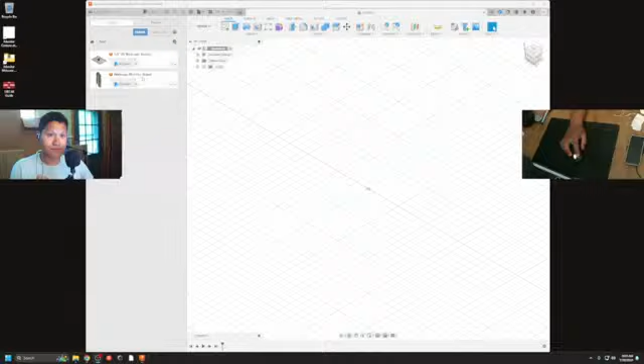Gentlemen. So, last time we left, I had... Okay, I gotta check that. Okay, it's reminding me about tomorrow. It's like I swear I don't have anything today.

Last time we left, we were thinking that I wasn't gonna make the actual camera attachment that goes into this shoe mount. But I've done some thinking, some research, and I believe we've changed our mind.

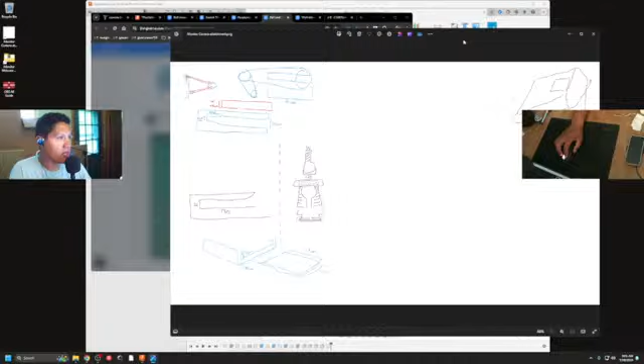I have to pull up the right website though. I think the biggest inspiration we are going to get is this one. This is pretty much exactly what we were going to do originally. So let me open this up. You know, a screw, and then we put this on top. But for some reason, this makes it seem easier.

Stop. Because, why was it? Well, one reason I didn't just want to buy the hardware, because it was like $6. I was like, I can print this for like $2. That's one thing. Right now, I think we can do this where it only costs like one bolt.

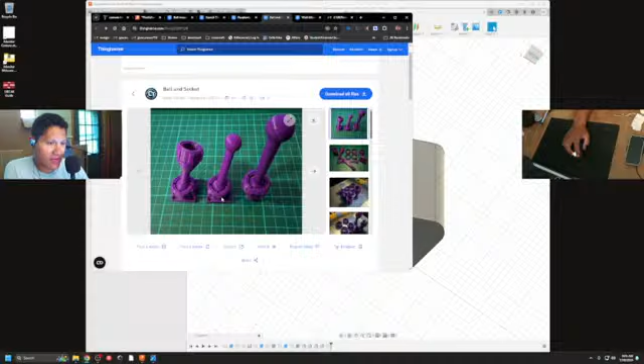Because if we can just make this assembly, or just steal his assembly, which I believe I could do, but I think we're not going to, just for the sake of a learning experience.

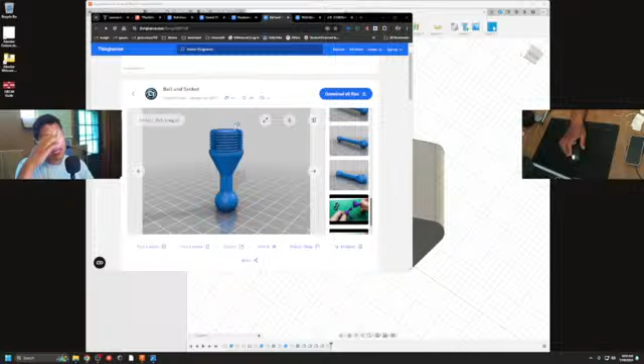We are good. Make sure I was on the right scene so you can see what I was doing, since I do accidentally have on the wrong scene all the goddamn time. Epic Pen is opening up.

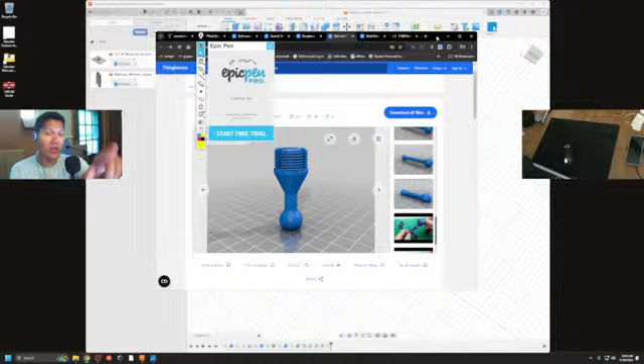Also, guys, I finally got my desk camera. I got my setup pretty much solid. This camera, I've been juggling things around, trying to figure out how to get it to exactly what I wanted. And the problem was this camera's color temperature was wrong, so I'd set it manually. I was like, well, that makes it very useless, because the light outside is changing all the time, there's sun coming in, the light temperature will be whack all the time. But also the quality was a bit off, a bunch of stuff. But I was able to download an update.

Okay, either way, so my thought is we can just have a nut that is held captive in the plastic here, and then it'll rise up out of the ball and have threading available. I was also thinking we could have a cap here, because we don't want it just falling out, and the cap could have, if this is where it's held captive.

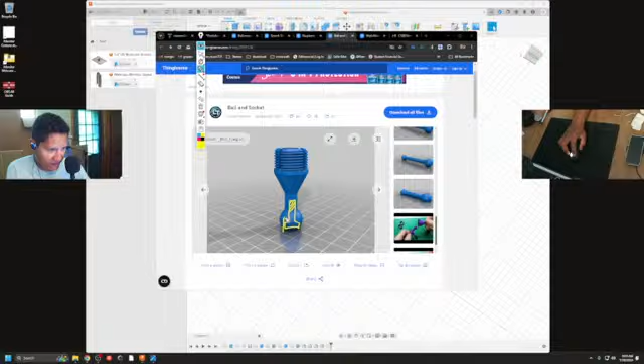And I was thinking of doing it like, since it's probably going to print this way up, I was thinking of just having a taper here. I don't think that would mess it up, like where the bolt would sit, and then it would make printing easy.

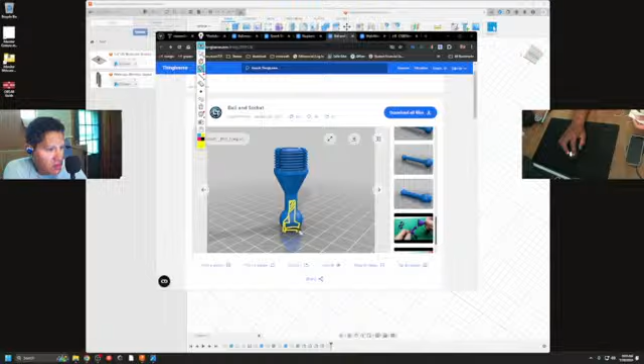But I was thinking we could have a little cap here that, I don't know, clicks in somehow, and didn't go all the way to one of these edges. So you can go in there with a flathead screwdriver and pry it off if you needed to get to the nut or bolt, which I don't think you would.

Either way, this is what we are going off of. We're gonna figure out how to do screws, I guess, right now is the game plan.

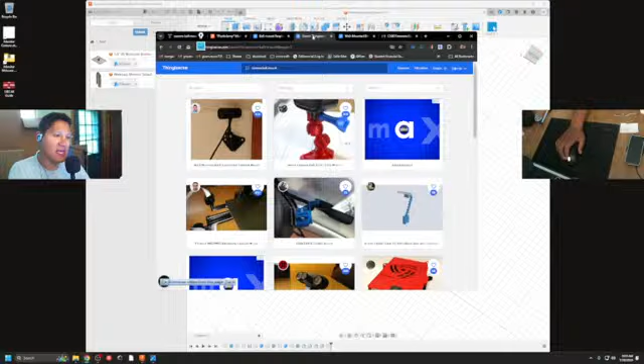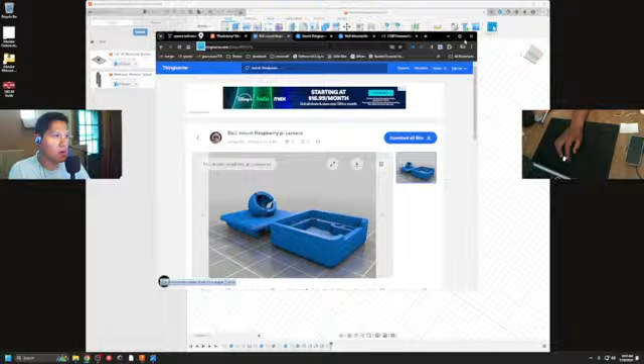Did we lose our original? Might have, I'll have to pull that up in a second. Ultimate mystery.

This one, okay, we'll just have one bolt. We're not going to have these screws either. Where he has this plate that is screwable in, that will just be our hot shoe, or our shoe mount, you know. I should probably pull up my CAD because I know I'm eventually going to mess with it.

Okay, so yeah, the plan is... the other thing I liked about this is it didn't have the taper. My original picture, I was like, the only way this works is if I have a taper so that it cinches down on it.

But this guy, I don't know if it'll let me open with Paint through the shortcut. It will, Epic. This guy instead has, we're just going to redraw the whole thing. Sure, with straight lines. Okay, straight lines that aren't so fucking thick. Oh, there we go, 1 pixel.

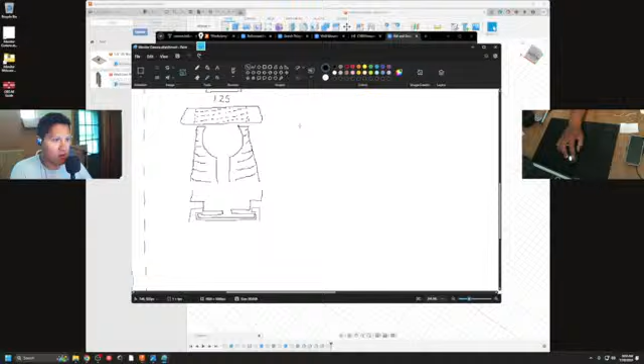So we would have this be indeterminately cut off. Obviously not past the halfway point, but it could be anywhere from here to here really, depending on how flexible the print is, the limiting factor.

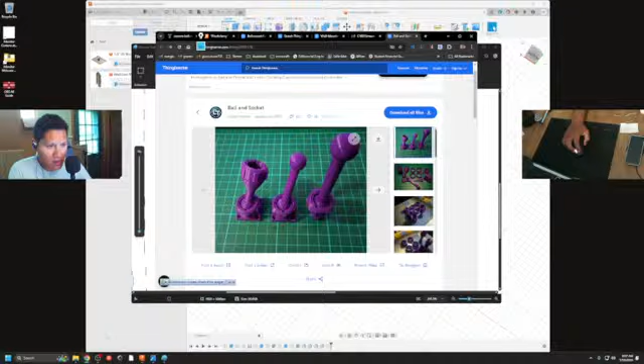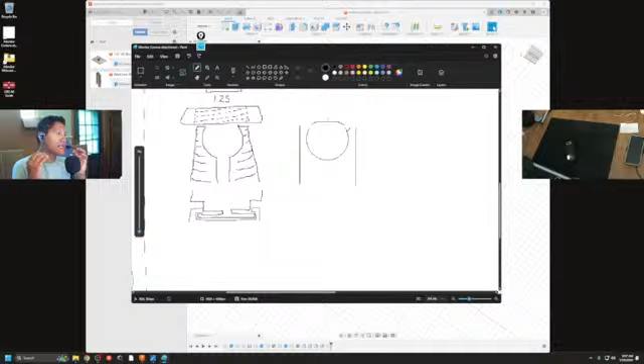Let me pull up this thing for reference again. Like this, I really like this design. So it uses straight threading and then this little lip here, and that lip will make the top half of this circle and push it down, which means this ball, like the socket, can literally be exactly how big our socket is. I don't need to be messing with too much tolerances. I probably still will have to, but this will essentially be exactly how big it needs to be, and this will just be a regular thread, which I feel like would be much easier to code, to model up, that is.

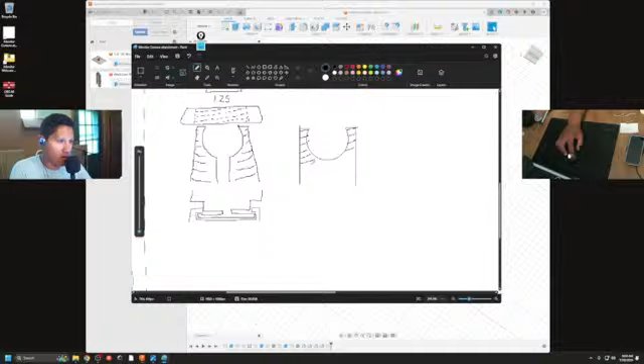Perfect. And then this cap, we're just going to draw it for the sake of our sketches. Bring that out a little bit. We'll have the same thing that we drew on the other side. I'm just going to draw it separately. Plus this lip.

Lip won't go out. It doesn't even need to be a lip. It could be flat right here, and that would still just push the ball into this material, you know, cause friction. I was overcomplicating it, which is probably good for modeling practice, but not good in totality.

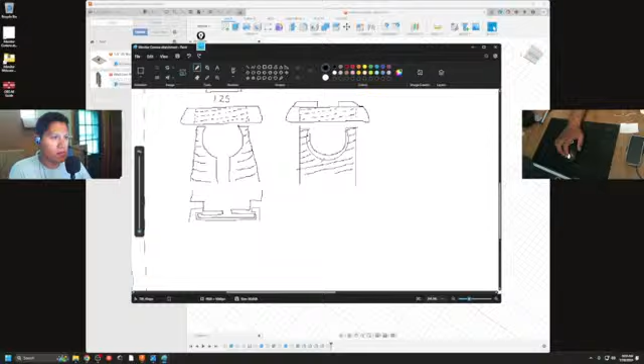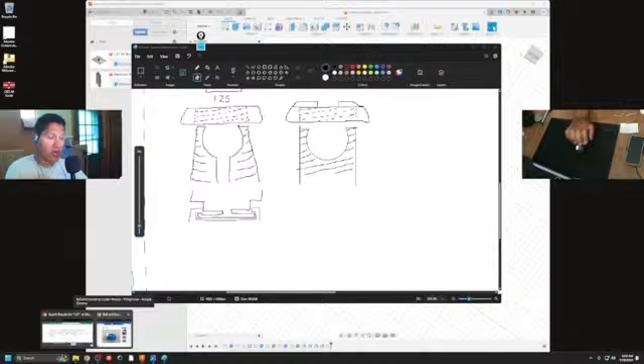So let's erase this ball on the inside real quick. Multiple clicks in case I mess up, so I can undo one of them. I drew that so you'd know it was separated - that was the other thing this guy did. The example I had in person, maybe I should add notes, because maybe there was more than one separation here. But this guy made me realize I can segment it a lot, I can do whatever I want to it.

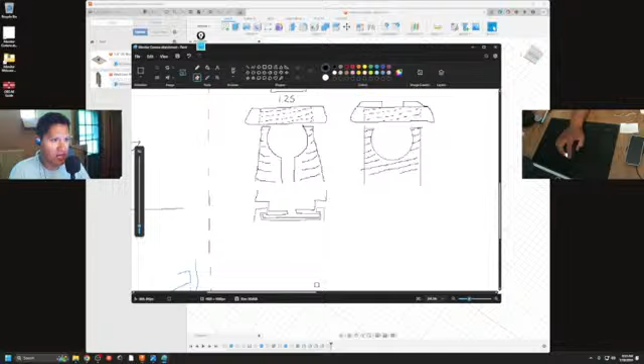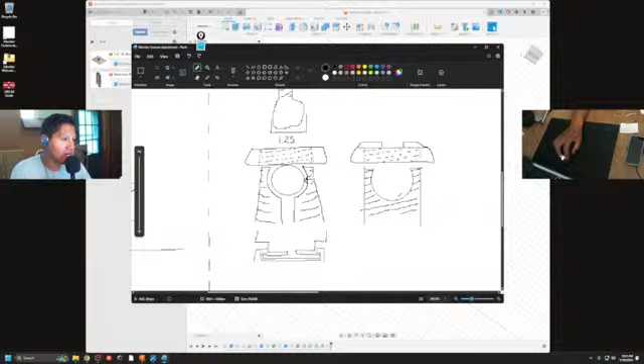Which is what opened my mind to this possibility more, because not only do I not have to do the weird taper, which would be hard - the way the ball goes in. On my original design, I think the ball was supposed to go in loose, and then this taper was supposed to cinch the side down on the ball, which is cool and dandy but unnecessary. That literally means, because these curves will be different, there won't be as much contact. But if our ball is literally the same size as the socket we print, there's obviously going to be max amount of contact.

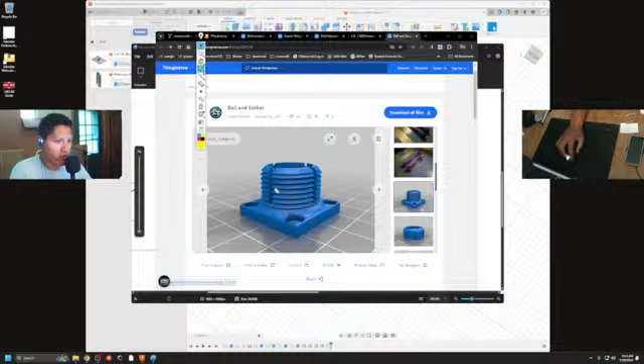So my idea was we can make as many segments of these as we want, and we can change how flexible they are, because the ball will need to pop past this slight curve here, become more like semi-captive. To manage that, we can change how connected they are at this bottom part - if we have it like this square, it's going to be pretty stiff. If we cut it off a little bit, less connection, it'll be less stiff, and so on. We can print off one of these segments and see how stiff it is and change it. There's a possibility of the plastic being brittle, but I think this is such a low tolerance, a low bend, that it won't matter. That's my theory.

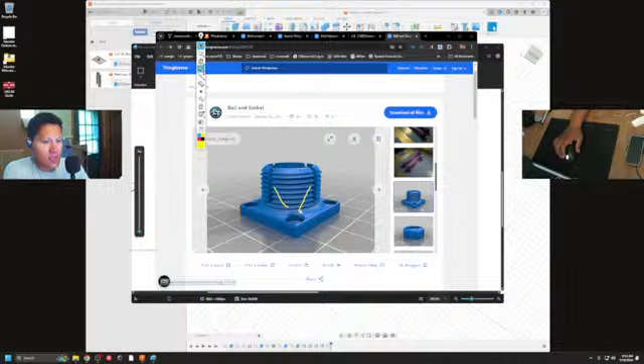But yeah, that's the game plan. So it's pretty much time to find out how to model a screw.

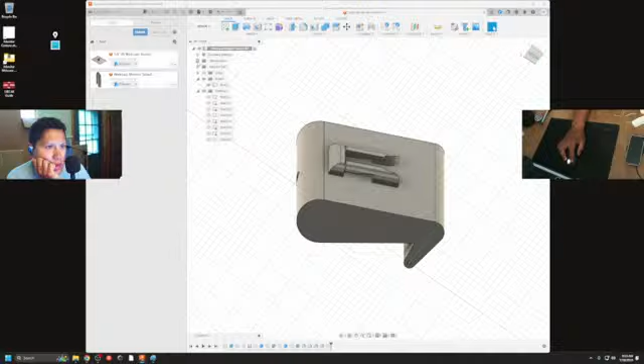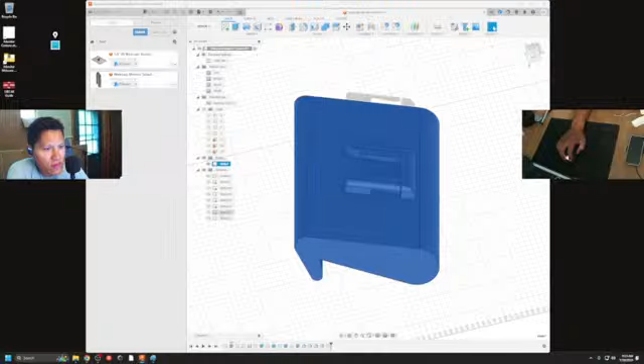I don't think I can get inserts from mounts, but we actually probably won't need this anymore. This is for our old webcam that we just had on there, because I could just point it at my mouse. But our new webcam, for the purposes of modeling and doing cool stuff, is 4K.

I'm gonna make a duplicate so I don't mess up. Okay, where this is located - we can zoom and enhance without much quality loss. So I can really be like, oh, I'm doing this. Like yesterday, or last stream where I was showing the hot shoe and whatnot and the tolerances - I can just zoom in, and that would be epic. That's what we would love.

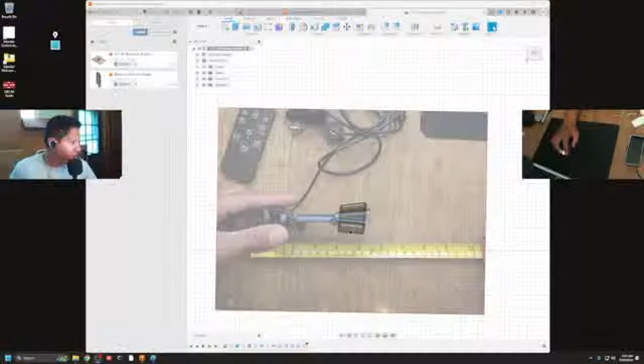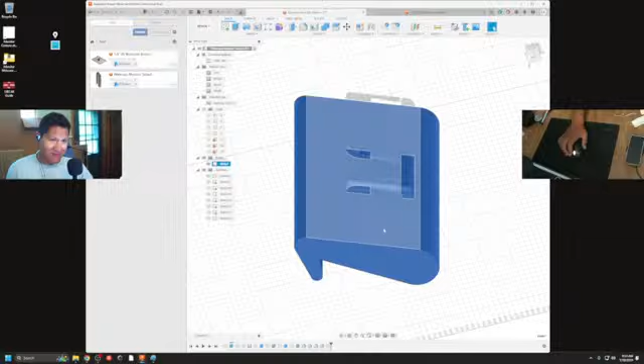So this is not that important anymore. If we don't have the component, then we don't have it. I'm just trying to see if there's anywhere I could have lost it. Every folder is open, every body is showing. This lines up that this is just the end of this build, has nothing to do with the second one. Luckily the little square head is not hard to model, but it's annoying it was gone. I was hopeful I could keep them in the same file, but it appears not.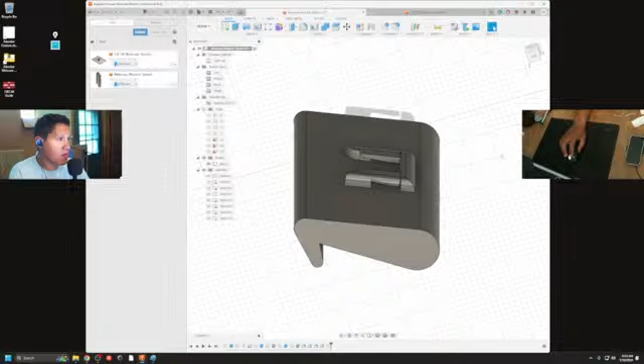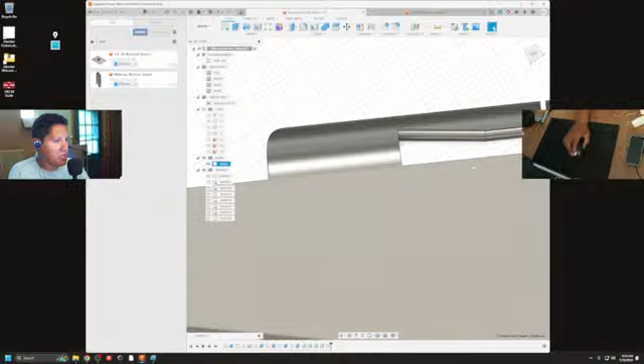So we're going to go to our sketch, edit sketch. Maybe leave the inspect menu just so we can see what our dimensions are. I'm fairly sure it's 1.8 by 1.8 by 0.2. Finish sketch. Oh, I have no measuring device to measure this area, there's no line there.

Actually, if we edit this sketch, I believe - did I do this one separately? Oh no, that's for pulling out the tabs. Okay, finish sketch, this sketch. Am I tripping balls, are these sketch? Oh no, okay, so there's one tab on each side. Yes, we're figuring it out, we're going back in time. I wish escape would, if you hit it enough, would just go out of the sketch. Okay, there we go, we can see what we're doing.

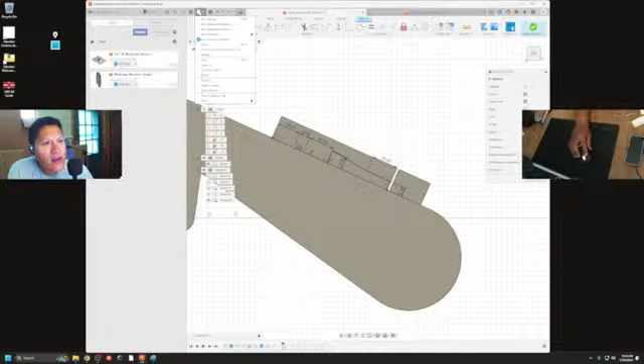So this is 17, this is 25 tall, so we make ours 0.2. So 1.8, 1.8, 2. Let's make file, new design, quarter 20 shoe socket mount - something, I'm just thinking of the name. Quarter 20.

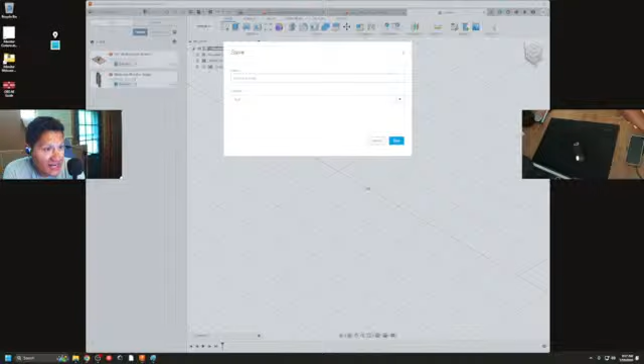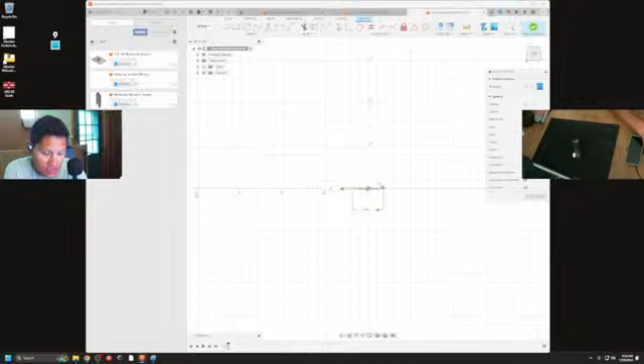What if we go a hot shoe? No, sorry, shoe to socket. I think we can change that later, it's not too important. We will start a sketch on this bottom plane, square from center. Go, and in millimeters, so 180 - it's 18 millimeters, try 18. Enter. Extrude, okay sketch, pull, make sure it's in the right direction. And just 2 - I believe that looks too thick, but no, it's gotta be correct.

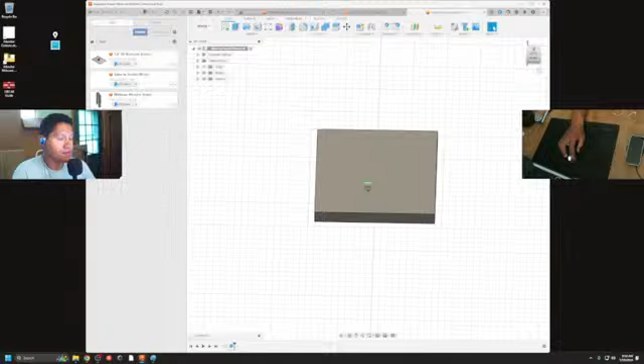We could fillet some of these corners, but I don't think so, I'm just gonna leave this. And now we do need to see what the internal - save again. We go forward in time now. Maybe, finish sketch, forward in time. But this internal is, I think I just have to look at our press pull.

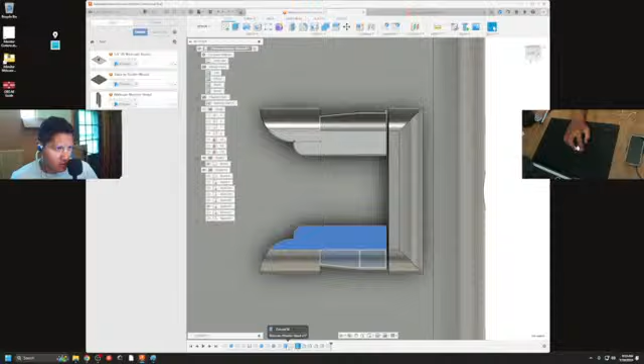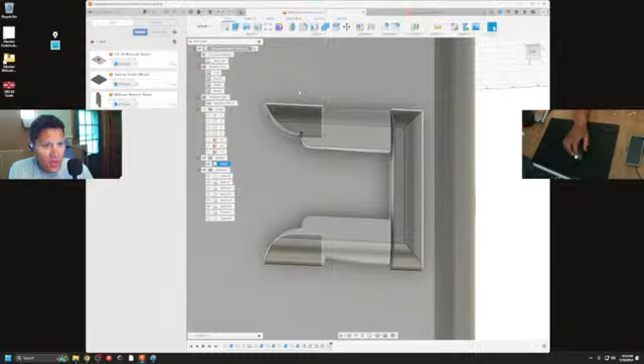This will show how far I pulled this out, and then we can just subtract 2 of those from. I don't think I pulled them at the same time, let's see. Just go back in time. Edit feature, 25 millimeters. So is that just as tall as it is? Yeah, I made a square of it. Okay, 25, come back over here.

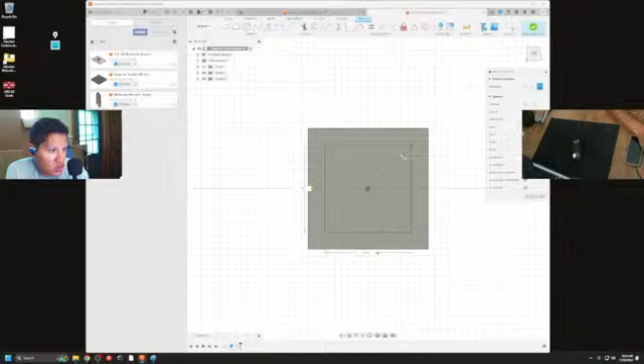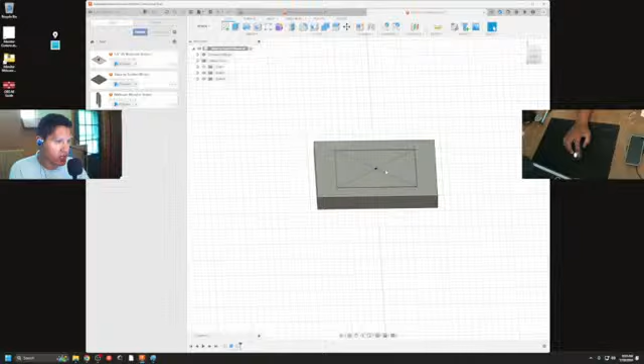We will make another sketch. Can I select the center? That's pretty cool if we can. Do have to do some math really quick. So that's 180 minus 50, 130. Yeah, this looks about right. Should we include some tolerances? Yes, so I'm just going to do 12 because that also makes it a nice number. Finish sketch, I shouldn't need anything else. This is like working with the most amount of area we can - making it round would just give us less surface area, so I'm not going to do that.

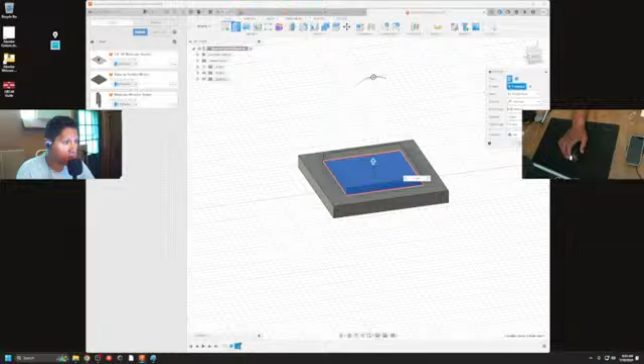And then over here, I don't know exactly what this measurement is, but based off looking and having our shoe look good, I'm just gonna pull it up by 12, because this is in by 12. I think - well sorry. Centimeters now, what happened? Tell me that's 12 millimeters. Okay, 1.2 - yeah, it feels wrong. So it's gonna double it, so 24, so 2.4.

Yeah, that's right, okay, gang shit.

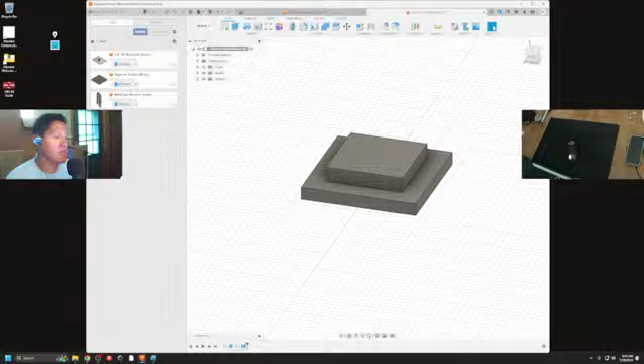Blow my nose again. I tired myself out yesterday working, I think we're gonna do it again. Felt great last night though in terms of energy level. My knees were feeling a bit more whack actually, which is not a good thing. But I think it's just because I have braces on my knees because they're busted. I have braces and compression sleeves because the braces are strapped on with Velcro, and the Velcro is definitely failing. So originally I had compression sleeve and then brace over it, but the brace is just falling off, so I put the whole brace on and then the whole compression sleeve over it.

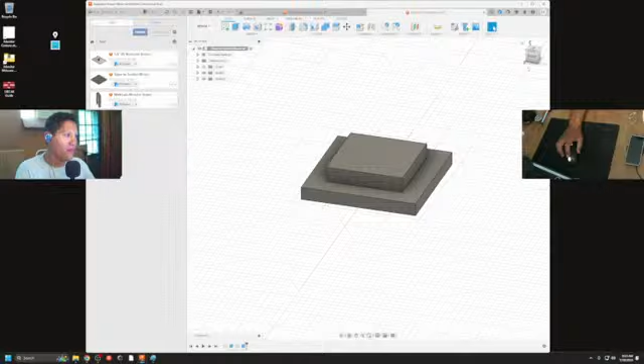Okay, done with that. One thing I was looking up but I could not find - my dad told me once in conversation that there are known ball sizes for these sockets, like - what's it, not architect, but I think of a word that just means it can move. I don't know what the word is.

But I couldn't find it. When I look up ball and socket sizes, let's look it up again. I either found nothing, or I found... AI overview, okay this is actually good. I found a socket wrench, no, I was looking for the ratchet one. That's not the right sound, but you know what I mean.

Okay, does this show a reference? Ball options, OC mount. See, this is saying A size, B size, what? But I thought I opened this the other day and it didn't actually show me. Or maybe it's just because of B size 1 inch, C size 1.5 inch. So we're looking for A size since... what does it say?

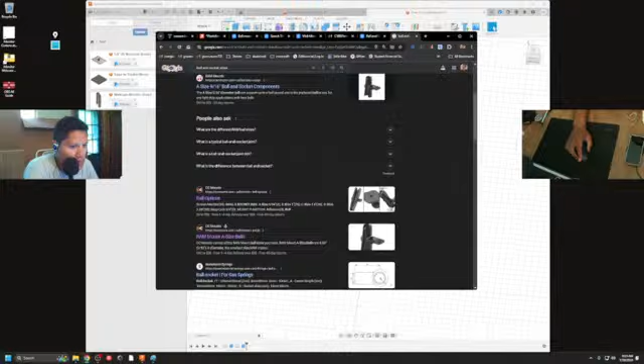See, I don't think there's an easy way to look it up. Let's close this. So 9/16 inches is that. Let's pull up our measuring tape, get some slight reference.

We'll pull up the desk camera. You guys aren't gonna be able to see it. So the plate we just made was 12, 1.2 centimeters, so that's like this much. And then...

9/16 inches is bigger. So over here it looks like it's generally gonna look like that, but I don't think that's gonna be too much of a problem. We will find out when we actually do some calculations of what 9/16 translates to.

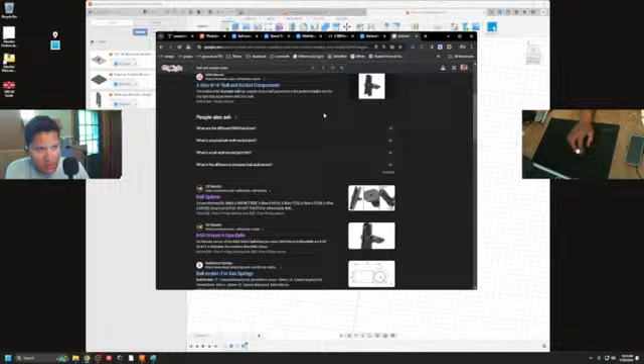Let's close this other tab. Okay, 9/16. Look at it. 14.3 millimeters. Why was whatever it was popping up? Oops, caps lock.

I mean, we must be... oh, my shift key is stuck. Man, I cleaned this keyboard and it didn't fucking help. I mean, it did help, there were a lot of keys that were sticking. And... seems lesser than mine.

9/16, okay so it just rounds up. I guess we'll just go with 1.43.

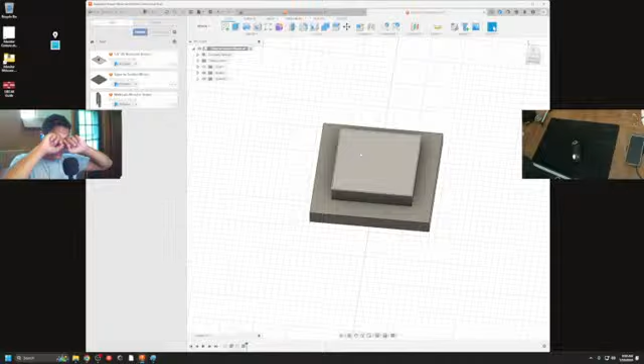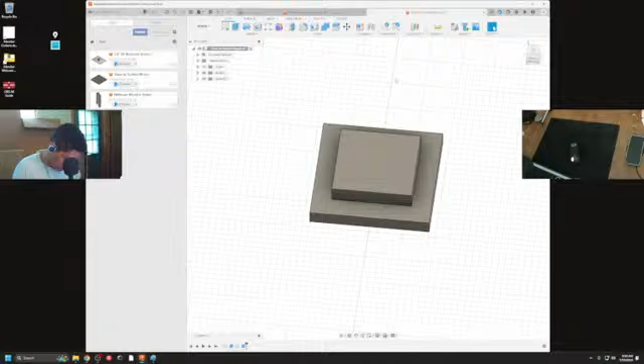So we do need to do some mental math. You know, how big do we want the walls? The other thing I was thinking about personally is we might need to have... I might just already have an extension. No, I don't have an extension. I'm curious what this ball size is, the one that I already have. It's definitely less than an inch. It's definitely less than 9/16.

There's got to be another. So wait, 9/16 is just over a half inch, and this is just under. This size would be perfect, but I want to use a known size. Let's see what this motherfucking thing says.

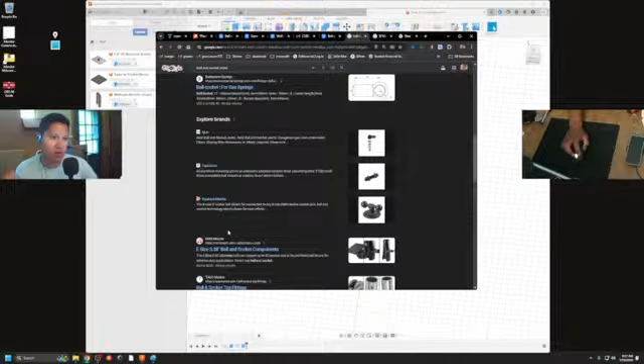I mean even when I was on the Menards website — let's go to Menards and see if there's a hardware section. So I was looking up quarter inch. I wanted to find a quarter-inch bolt, like an inch tall or something, and I couldn't fucking find it. Is there a hardware section?

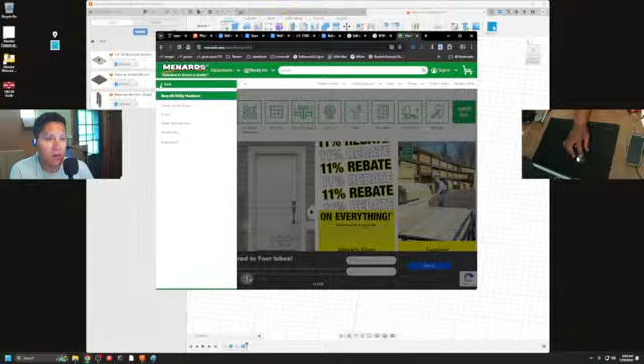H is for hardware. Hardware. Fasteners and connectors. Utility hardware, no, back, fasteners and connectors. Let's go with bolts. So what I would want is just this, since it has no cap, or like the hex bolt.

Instantly thinking of a good word and then it immediately leaves my mind. The cap will be what touches the wall. You know, all these other ones — I mean, this one could work. This one wouldn't, with our tape over there. This isn't going to help with finding the ball that I was looking for.

I think they have little balls at the store. I wonder if I just looked at them. Quarter, 20 ball stud.

Okay, let's see how big this is. It looks like some of it might be from this, this is motorsports. See what Amazon has to say. Whew. Says by 0.25 inches.

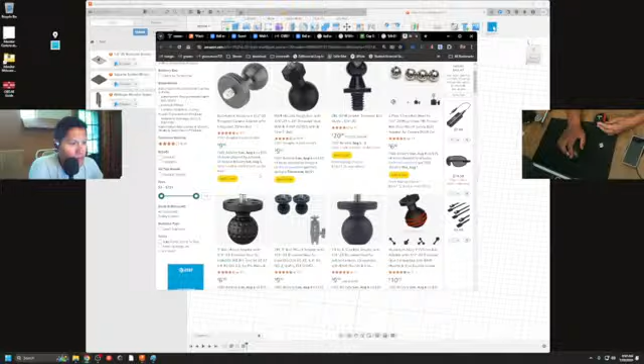I think we'll just go 1/4 inch, I just want a standard. I want this 1-inch ball. 1-inch ball, we'll just have to go 9/16. I don't know, like is there a different standard for camera stuff and other stuff? This one's just too small, quite simply.

I don't know why I get weirdly tired and exhausted from talking during these streams recently. Normally I'm just like going on forever. I'm not lightheaded.

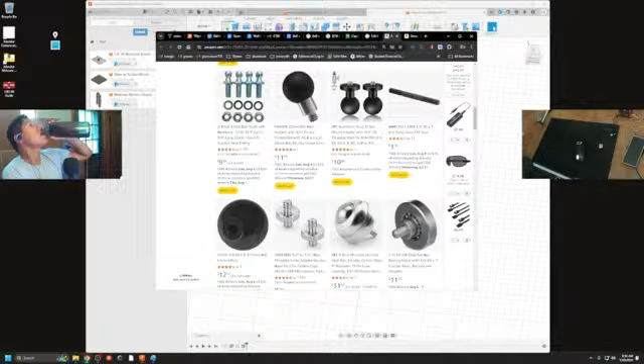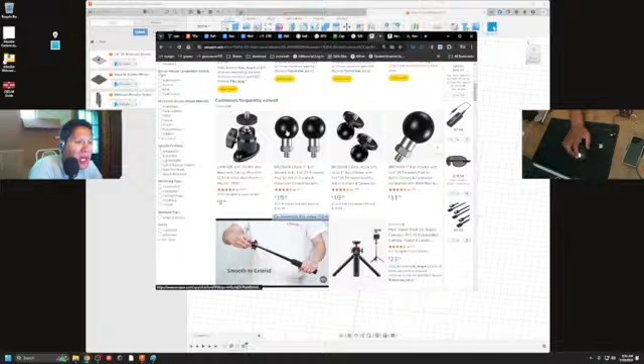What if we put a ball as the camera? Let's see what pops up. Does this tell me what ball size it's using? Because it's definitely not an inch. I just want it to tell me that. That's all I want. That's all I wish for in life.

1-inch ball. 9/16 are literally half inch. So it sounds easy, 1-inch. Tell me what size the ball is. Nope. Okay, I gave up, we'll go with the 9/16.

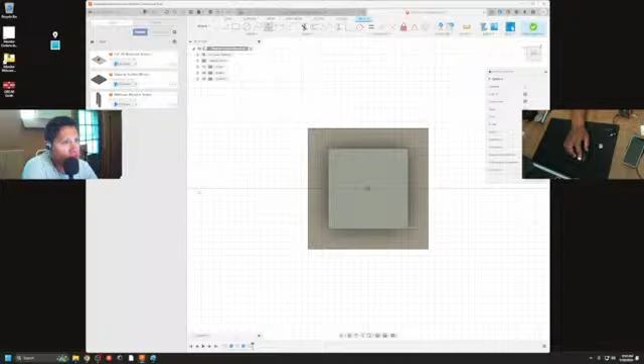Okay, so let's just get back to this. I mean, we can change it later, I just want to get it set up right in this program. So the first thing we're going to do is sketch. I think I keep overthinking, I should just start doing something from center.

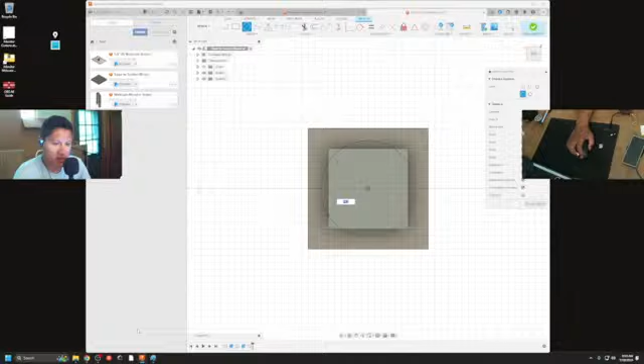So it was 14.3. Just type in 14.3, that's how big our ball would be. And so far I'm really liking that. Let's double check the measurement. I was like, it can't be that easy. Okay, 14.3, that's right. So it'd be 14.3.

I think we're just gonna make 2 circles just so I know what's happening. If I make this 18, so the wall thickness of our screw part would be 3.7 centimeters. Just trying to get a... that actually seems like, or it would be half of 3.7. So it's like 1.5-ish.

Hold up my ball for reference again. I'm just thinking about how much it would need. I think we'll go a bit bigger, we'll just go like 20.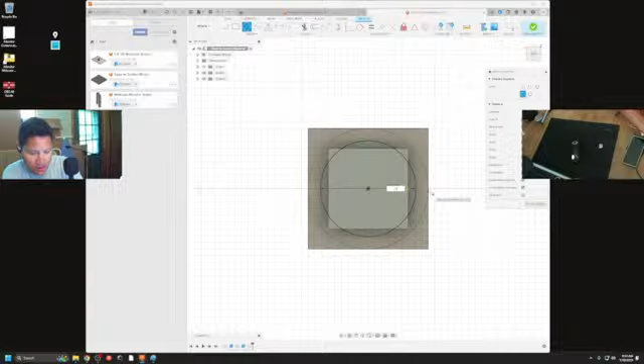I am thinking right now, which one's better, to err on the side of small or err on the side of big. If we err on the side of big, we can segment it more to make it flexible. Right now, the only thing I'm thinking of is, will it be able to stand the durability of me twisting a camera around it? And I think we're gonna have to err on the side of big.

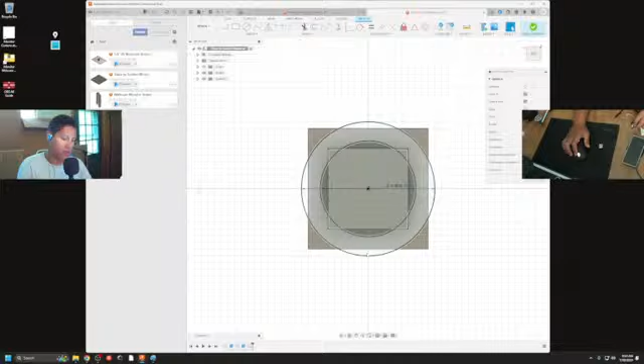And that looks good, so finish sketch, full surface. Select all of this. Okay, being the monkey. I think we're gonna undo. Sketch, just like, yeah, okay.

So obviously this needs to be taller than 14.3. Do I want it to just be 20 like I have in the other direction? I might just start with that, because then we can cut off the top and mess with the tolerance so that the ball will slip in there.

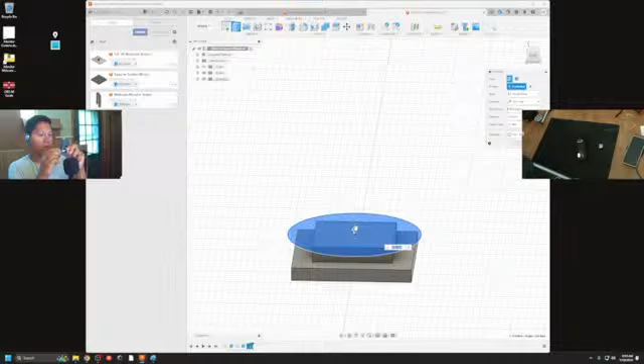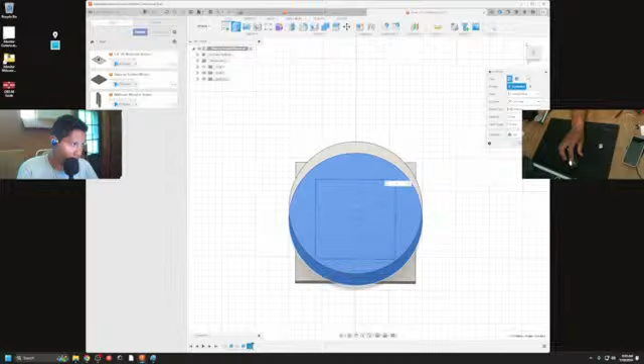That seems... oh, we need to do half of that. I was like, that's way too big. Okay, well, that seems wrong too. Do we have to do like 3.14 of 20? Is that what's happening? I'm just trying to think. We did a diameter of 20, so it should be 20 this way, 20 this way. Oh, not what I meant to do.

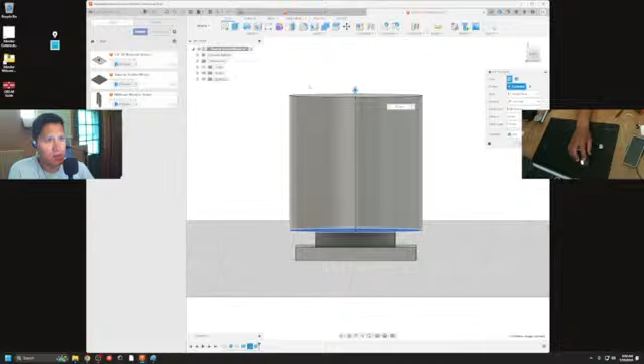Redo edits, put the 2 back in there. Yeah, no, I guess a ball would fit in that. So hit OK. Now I don't know how to make a ball in this. I feel like that would be like a boolean. I need like the opposite of a combine. I want to know how to make a ball.

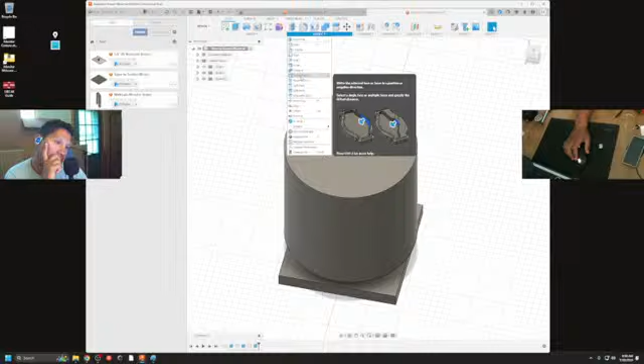One thing I was thinking is we could use the... like this, but like opposite. You know, like when you push-pull through something, it deletes it, but when you push-pull up into that, it extrudes it. I was thinking if we make a center line and then just make a circle, we can just hollow it out in there. I guess we could just see if that works. My feeling right now is that it wouldn't. So we're gonna just create a point on top and say finish sketch.

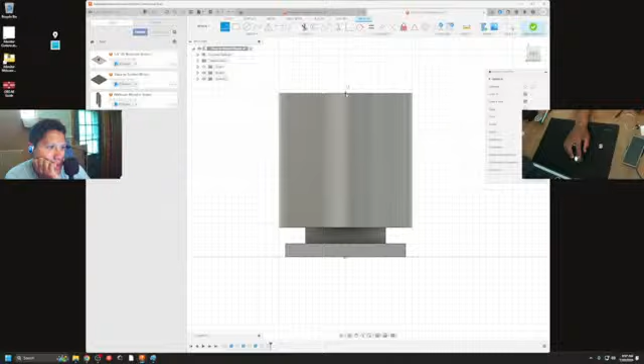And then we're gonna go from here and... oh, I can't lock onto that, which is really fucking annoying. I mean, it's centered, so it should be fine. I just don't like that.

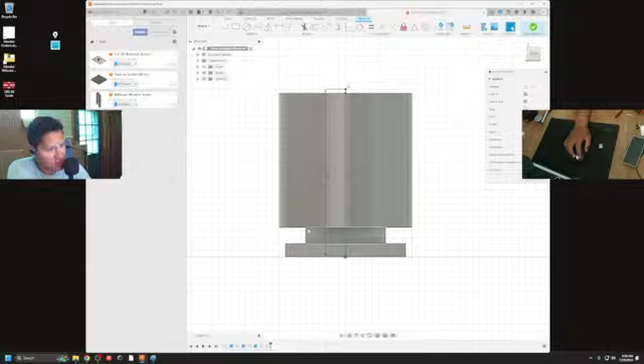Also, a lot of funky measurements are coming together. It looks like this is 0.2, this is 0.25. Make it square with this. Is this even square? You know, like measure that-ish. This is about 3. This is 2.5. We'll change that later, I shouldn't be messing with that.

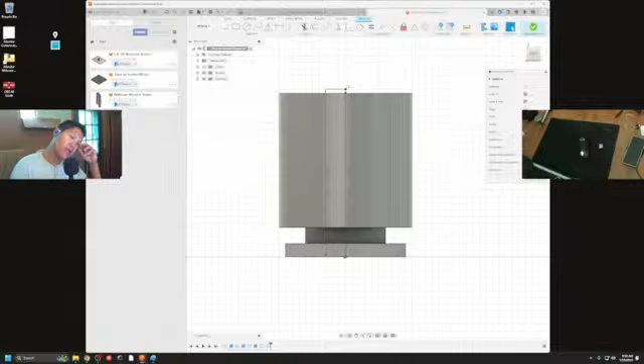Okay, I need our sketch to be attached to the top of this because otherwise... sketch this direction from that point. Yeah, I don't think so.

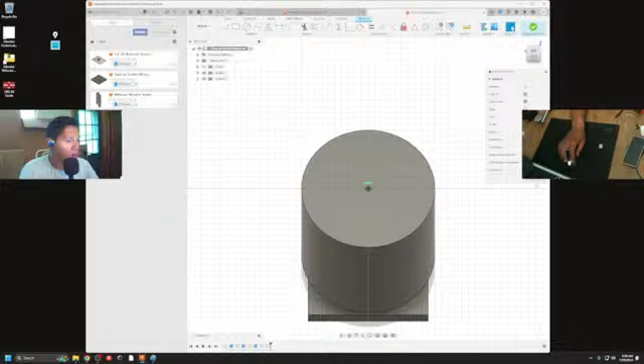I guess we could make a hole and then just a regular cylinder, and then build the... we could drill a cylinder into it and then build the material back in. But that sounds a little obtuse. Question is, is it obtuse? As long as it's editable in the end, I don't think so.

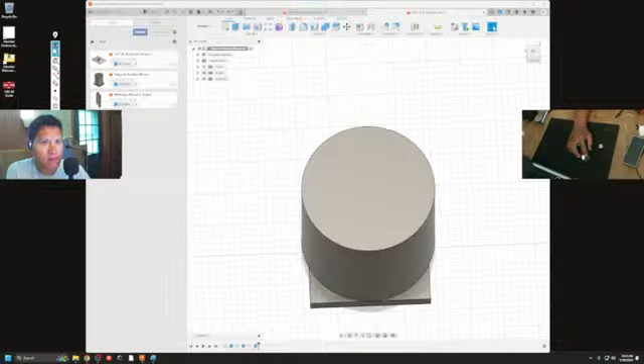So let's run it, I guess. Create sketch on this face, circle from center, 14.3, enter, and then we will finish sketch, extrude downward.

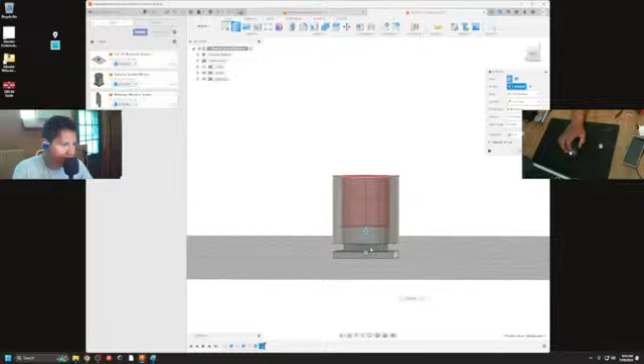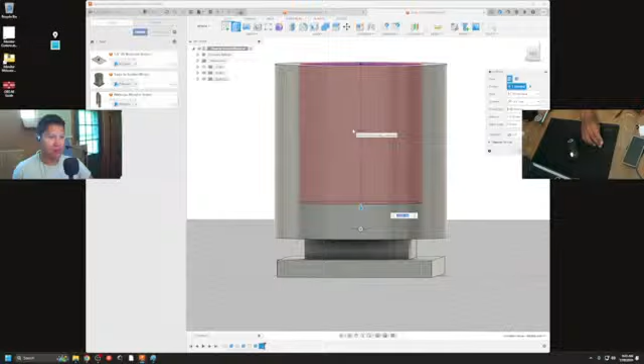Now this one we do have to feel it out, because obviously we won't need all of this plastic here. I'm just thinking right now - I think we're gonna make this so we have like a framework to have a ball socket. But the way our camera setup is gonna be, I think I brought it up in the sketch. I did.